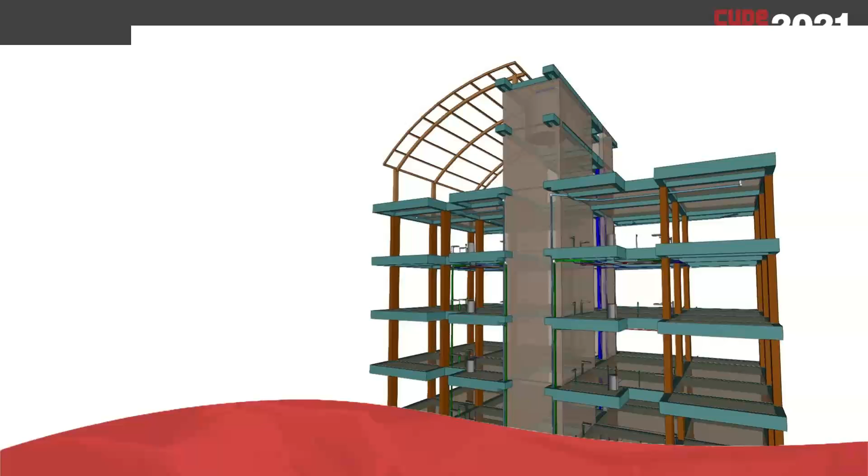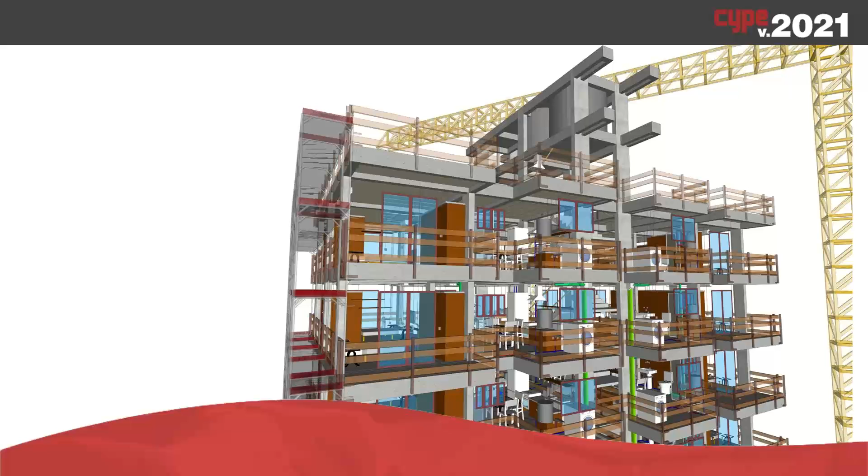Okay, here just showing some images. The idea is that we have all the disciplines that you need in a normal project. So all the building facilities, the structural calculations for steel and concrete structures, reinforced concrete structures. We also have the health and safety protections that we must have in our project during the construction of this building.

And this software is divided at this moment in two places. One of them is a setup that you can run on your computer, with a package of around 23 to 25 different applications. Here you have some of them. And then we have more than 120 other applications available on our cloud platform, BIMserver.center. Some of them are free, some have a paid version, and you can connect these applications between themselves, sending and receiving information.

I always try to explain BIMserver.center as a series. I'm from the 90s. In my country, there was a very famous series from Japan called the Power Rangers. The Power Rangers were different heroes, and each hero had a kind of vehicle that was actually a robot. These vehicles could work isolated, but it was much better when, at the end of each episode, these vehicles came together to turn into a big robot called the Megazord. This Megazord was much more powerful than the 5 different vehicles working alone.

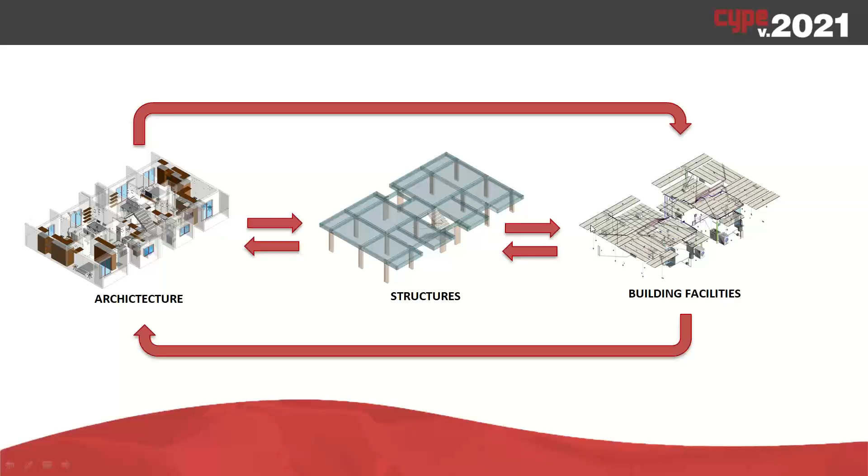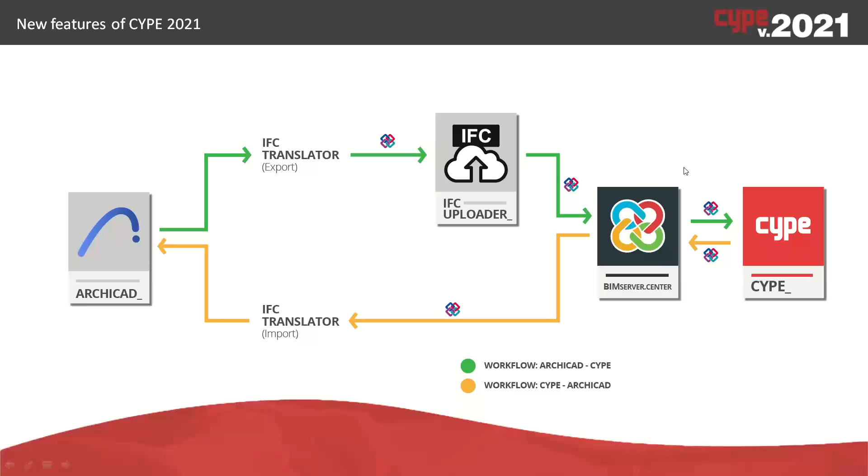objective of this platform. And we can also connect here other software that is not developed by CYPE, like Autodesk Revit or any other IFC that can come from ArchiCAD or Bentley or Trimble. If it's an IFC file, we can inject this information, this model, into the cloud using different workflows that we propose, and then interact with the CYPE tools. Okay, so that's the idea.

After that, I think we can see a little bit about the BIMserver.center platform. Today, these are real numbers; actually, they can update at any moment. We have around 72,000 users. It's a huge number of projects and downloaded applications, always working with IFC files. To access this platform, it's quite easy. Just search for it on Google or use your browser and type bimserver.center. So that's the name of the platform.

Here you find this platform in different languages. There are some presentation videos here. Here you can see the store where those applications I have been talking about are. You can find more information about our applications, the mobile version of BIMserver.center, applications to represent the projects in augmented reality or virtual reality. So here we have some information. And when we create our account, actually this account is free. You don't have to pay for that.

You see a kind of dashboard like this one where you can manage your projects. Here I have the last projects that my team has been working on. Some of them were created by me, but some were created by other teammates, and when was the last change. Here I can have an overview of some of my contacts. Inside this platform, we can add, find, or search for other contacts that are working using BIM technology to develop projects. So it's a great way to interact with other people that can be part of our team if we need some type of professional, for example.

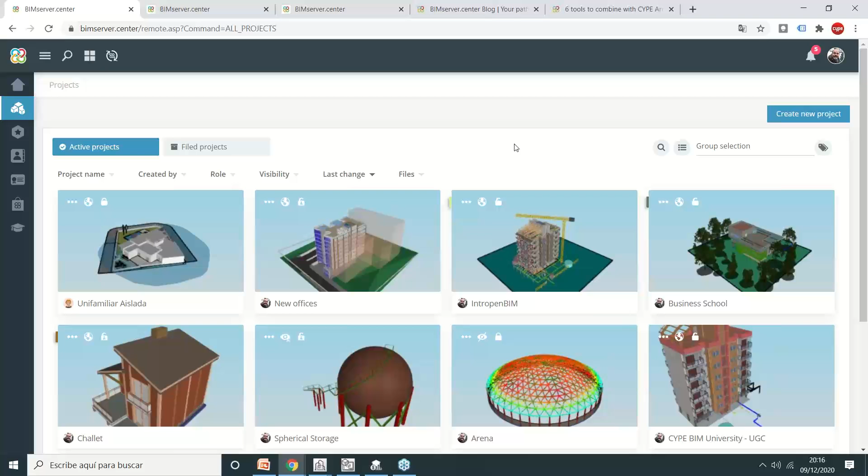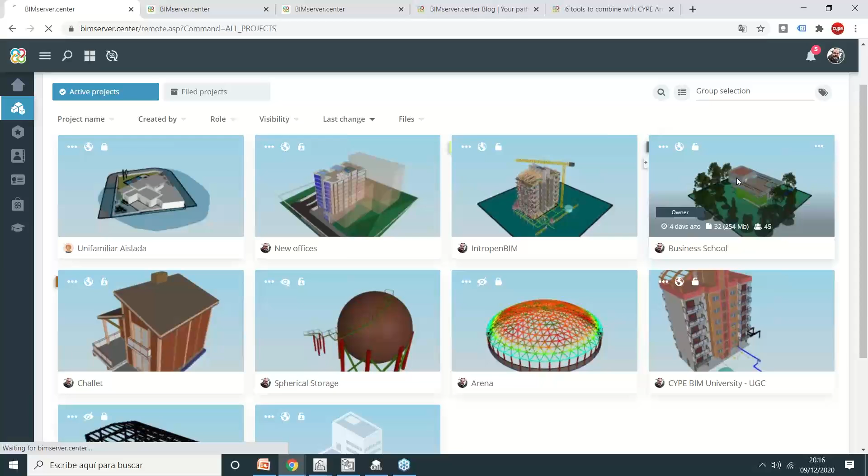So all the projects that I have been working on with CYPE and other software development tools, always using the IFC format. So we can send this information from one software to another, but actually we have a kind of copy of these projects in the cloud, and we can see this information without any application, just using our browser. This one, for example, the business school project. I'm the owner of this project. The last change was 4 days ago, and when we open it here, just repeating, without any application, just the internet browser. So it could be on your tablet, your computer, or your mobile phone.

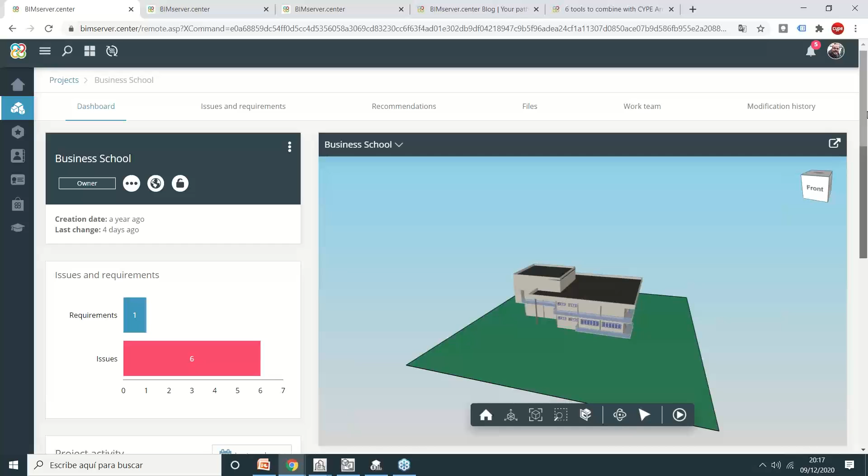Here we can have an overview of the project at this moment. Here we have a 3D view of this architectural model, this business school. And it's quite interesting because we have the other IFCs that came from different applications. For example, here we can activate the structural model, and, let's wait a little bit here, the water supply installation project. So we can see not just the architectural model, but all the other disciplines, depending on the disciplines we have been working on before, here on the cloud.

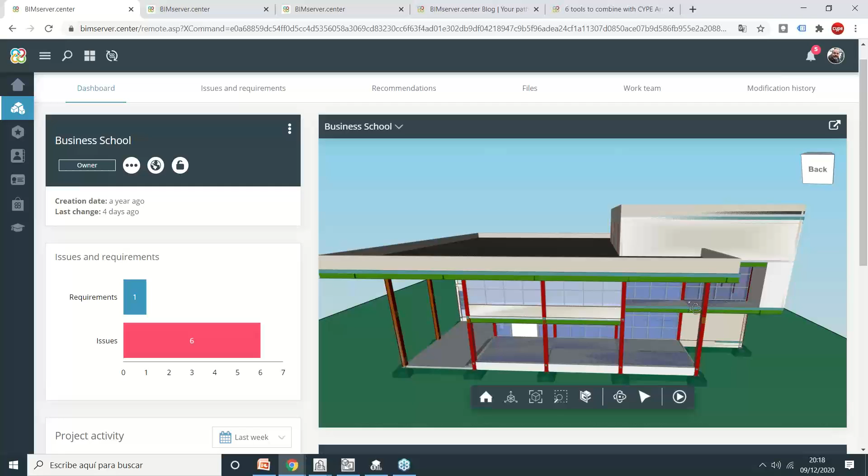Of course, there's the size of the project. It's important because some projects can be very big, and then it's going to be difficult to represent that in a browser environment. But here you can see the structure; it was a steel structure that was uploaded to the project. It's just an easy way to have an overview of the project, because this information is actually created in some software, and we can see it more precisely using the applications themselves. Here we have some issues and requirements that the platform is telling us we must solve.

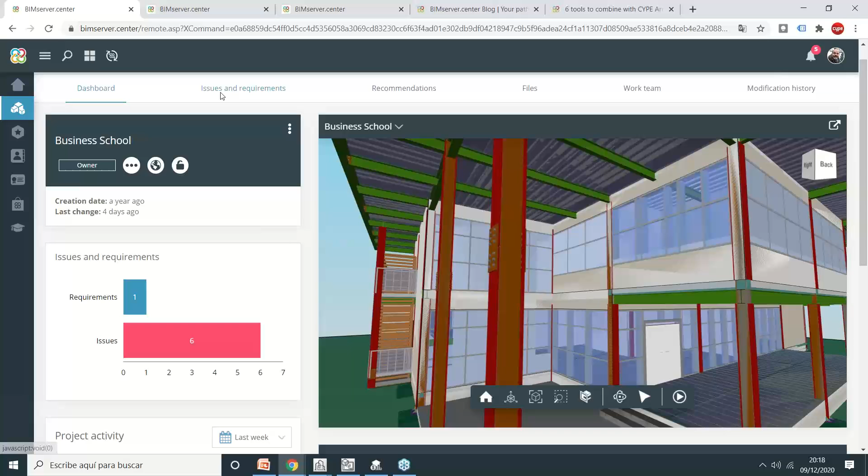We have here a kind of system where you can send information, ask for changes, or point out some problems that we have in our projects, sending issues or requirements. So we can consult this information here. At this moment, we have some pending issues that we could solve.

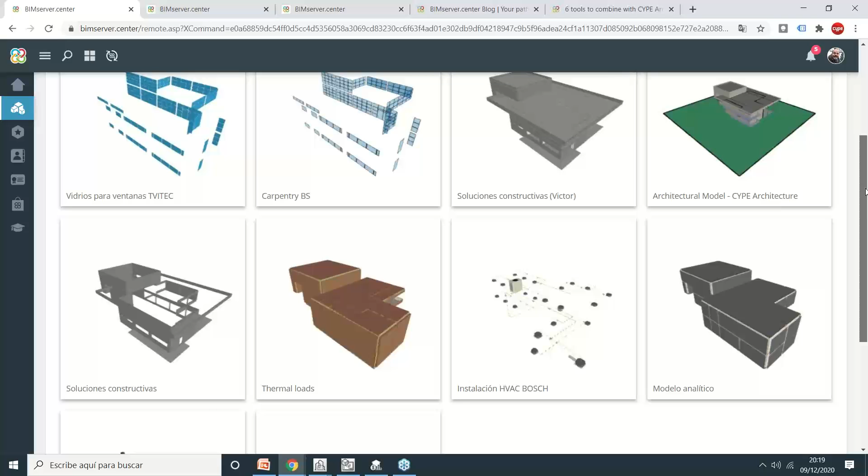Let's see how many files we have at this moment. So here we have 4, 8, 10 files, 10 different files, I think. One of them was just the project of the windows of this building, so it was an IFC that was created separately from the architectural model. Here the architectural model itself. Here the thermal loads that were calculated with a specific software for that.

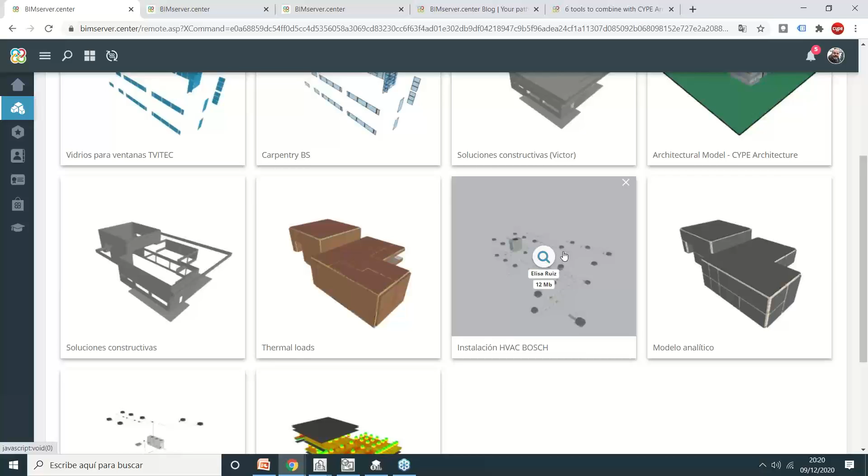Here the HVAC installation calculated with a system developed by Bosch. So different disciplines were developed for this project, and we can see the files here on the cloud. We can also see our work team, and in this part of the project, we can invite any other user of the platform to work together with us.

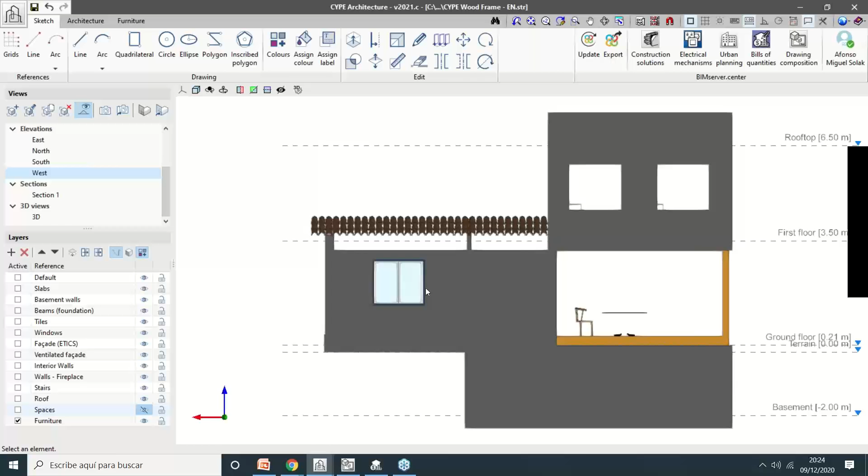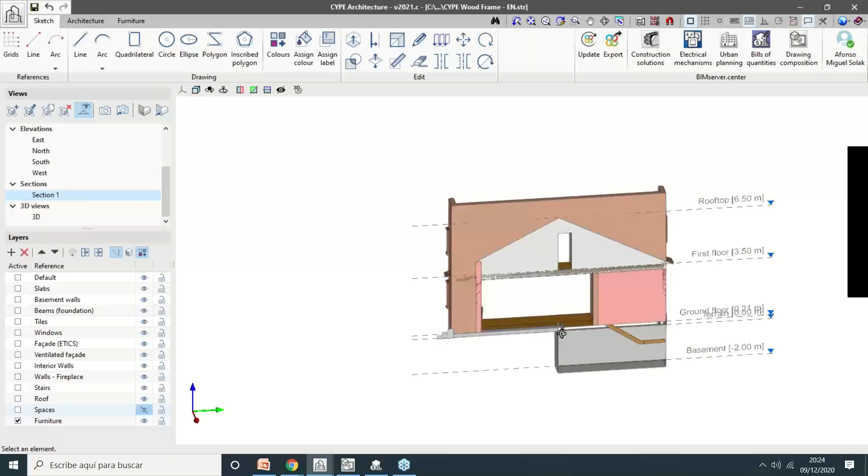And with these views, it's going to be easier to develop the model, because sometimes the model is complex. It's not easy to see what we have inside of the model. So by creating some elevations or some sections, it's going to be easier. We can also create different layers. So for example, coming back here to the 3D view, I created these layers that you can see here.

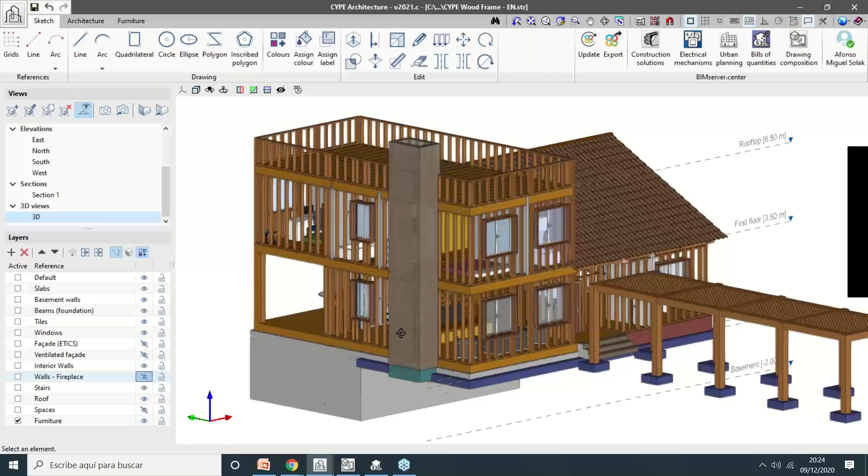So for example, let's deactivate the facades here, or another layer that was this other facade, a second type here. For example, the fireplace walls here. Okay, so I created different layers just to make it easier to develop this model.

And we can also, for example, unselect everything here, and you can see some other IFCs that were synchronized with the software using the BIMserver.center platform. What does it mean? It means that we have been using these buttons here. So we exported the IFC from CYPE Architecture to BIMserver.center before.

Someone received this information, worked with this information, developed a structural calculation, a wood frame like this one, for example, using, I don't know, CYPECAD or StruBIM, CYPE 3D. There are different softwares for structural analysis. They sent this information back, I updated using this button here, and now I have information from a colleague inside of my software.

Okay, so we always have this workflow. We will send and receive information to the platform using these buttons here, the export and update buttons that are present in all the softwares that are connected to this platform.

Actually, if we click on one of these views here with the right button of our mouse, we can see other IFCs that were sent by colleagues. At this moment, CYPECAD wood frame, it was the name of a project that a colleague sent to the platform, and now it's visible here on this view that we call 3D.

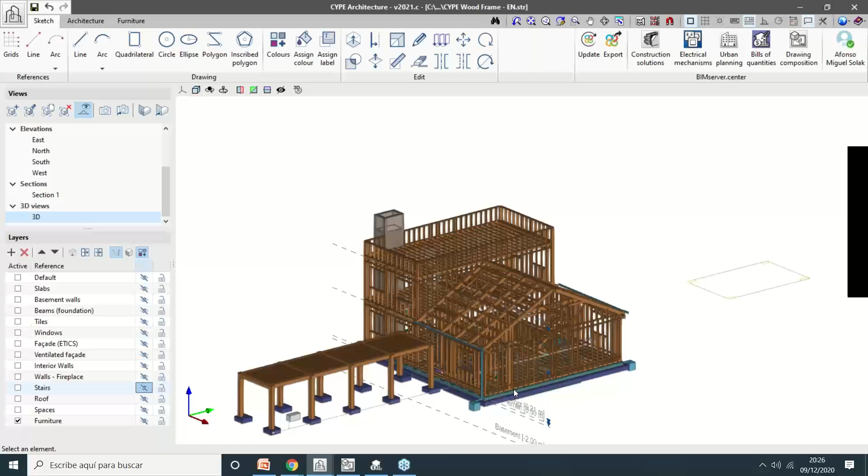Okay, so if we activate here, for example, these other sanitary systems and water systems, so plumbing facilities, we can also see that now these plumbing facilities are visible here on the software. They were not developed here on CYPE Architecture. They were developed on CYPE Plumbing, on CYPECAD, but we can work with them integrated in the same model, in the same Open BIM project.

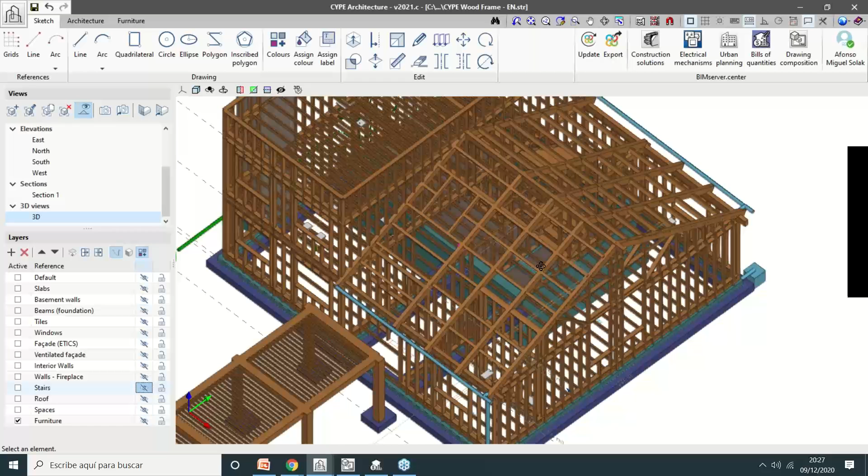All right, so we have been talking about the sketch tab, but we also have here the architecture tab. So we can first plan our building, creating here some geometry, but in the end, the result will be the IFC model or the architectural model created with construction elements. So here we are talking about vertical elements like different types of walls, curtain walls, roofs, railings, also columns.

Here we have also the different types of slabs: internal floor slabs, roofs, screeds, external floors. So different slabs. We can also add some suspended ceilings, some beams here. Horizontal elements. Then we can add some slope formation when we have a flat roof, for example, or add the roof tiles as we have here.

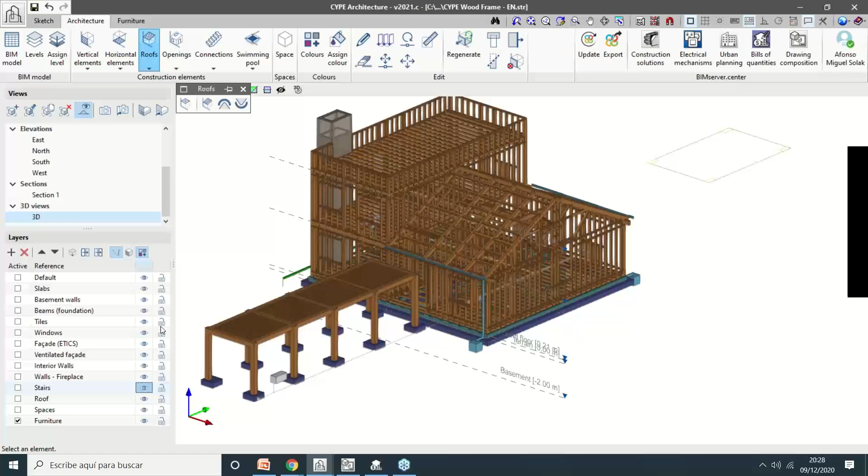Let's select these layers again. So these roofs, let me deactivate this space. So these tiles were created using the roof tiles option. We can add these details that we can have here on the roof.

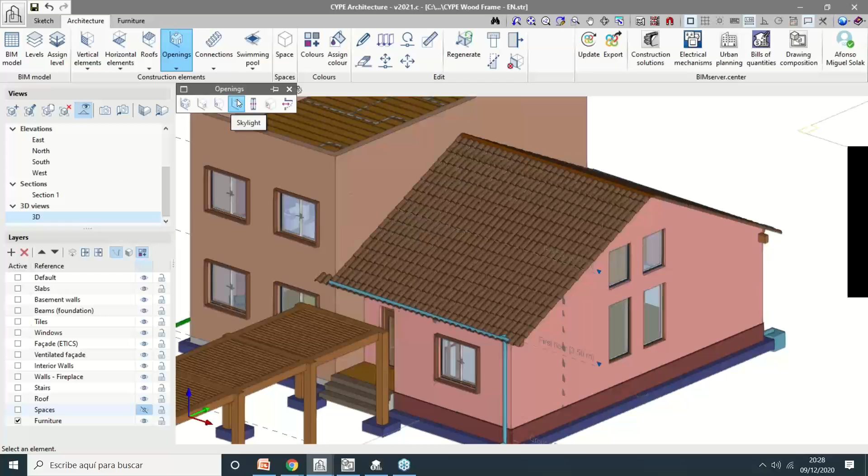The openings, so different types of openings: the doors, the windows, the skylights that we can have in our project. We can adjust the position of these apertures or openings. After we introduce one of these openings, we can change the position and also update this information. So different tools to introduce openings.

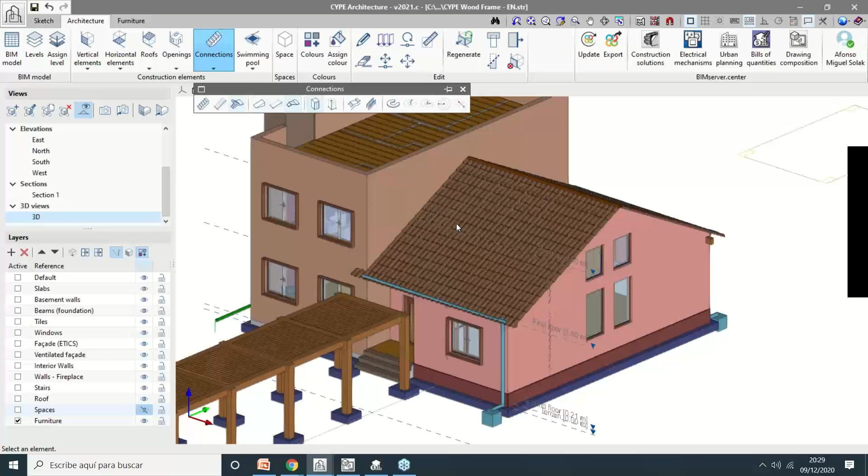We also have some vertical connections like stairs, ramps, elevators, lifts. So circular ramps, curved ramps, different options to add a vertical connection, and also some swimming pools. In this project we don't have a swimming pool, but let's introduce one here. To introduce a swimming pool, it's quite easy. We just have to add a reference.

We can also classify these elements using labels. Sometimes, for example, if we create a wall, it's easier to group these walls with a specific name, a specific size or a specific type. So we can do that using these labels here. With swimming pools it's not that common, because we usually have just one or maybe two swimming pools in the same project. But for columns or types of slabs, it's very useful to add labels here.

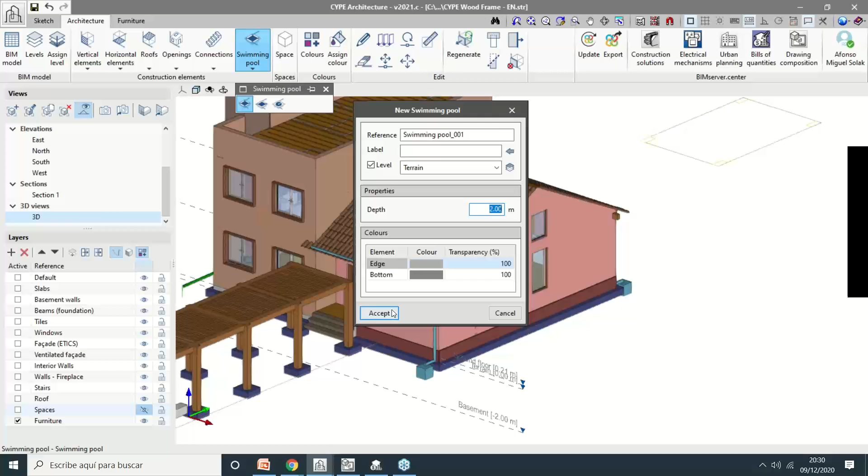We can add this swimming pool in a specific level. For example, in this project we created before these 5 levels: the basement, terrain, ground floor, first floor, and rooftop. In this case I'll create it on the terrain. Then we can set the depth of this swimming pool, some colors, and then we just have to select the terrain and start drawing the perimeter of this swimming pool. Let's wait here.

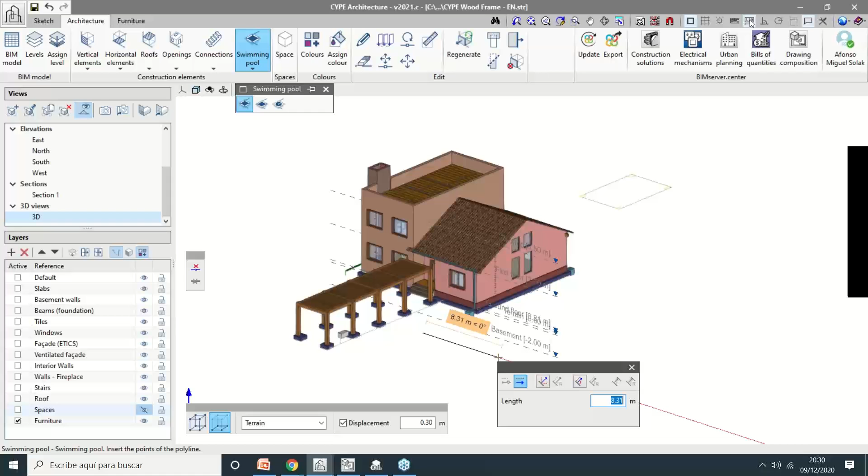Okay, so we can start creating our swimming pool. We have here some tools to add the length of each segment of this perimeter. We can activate and deactivate this option using this little button here. Okay, so here, let's deactivate here. Then, for example, here, and yeah, here we have a little swimming pool.

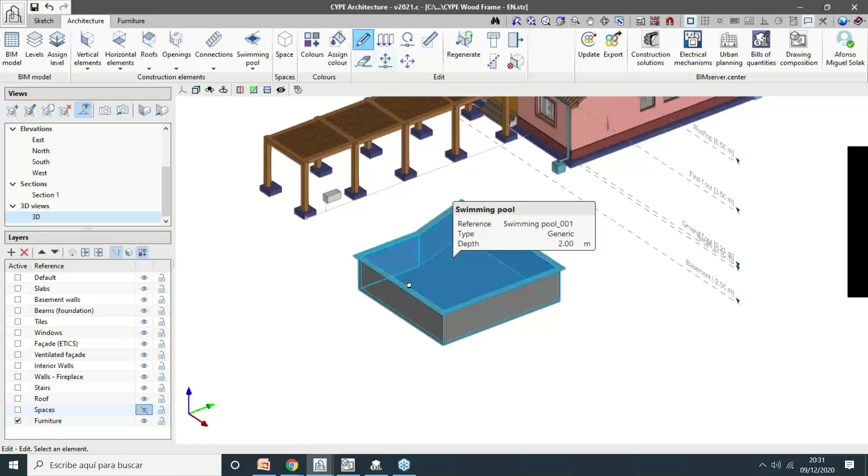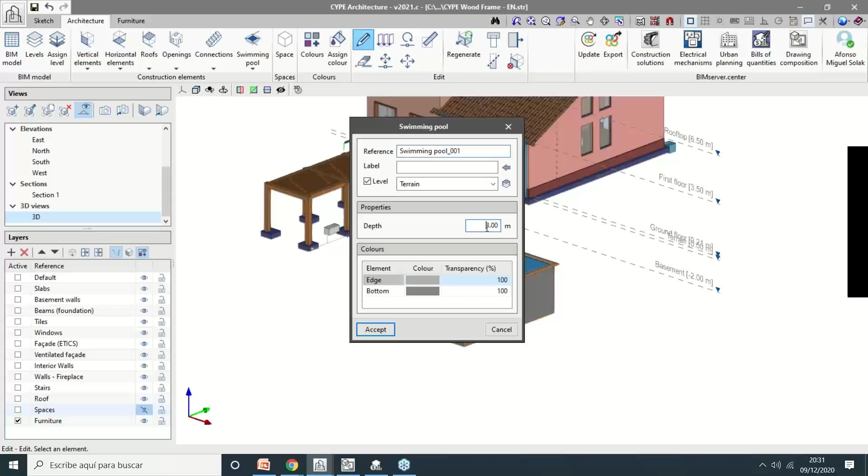Okay, so very easy to introduce a swimming pool on the project. I'm using the swimming pool as an example, but the other elements are quite similar. So we must select the construction elements from the menus here and introduce that on the model. We can also use this edit button here and change some parameters at any moment. So let's put here 2 meters again, and the element is changed.

You can see that each element has different parameters. So this is a wall, the wall properties. This is the name, the reference that we choose for this wall. We created different types of walls here. Then we have here different codes for the different types of walls that we have on the project. Each element is associated to a level, having a different adjustment.

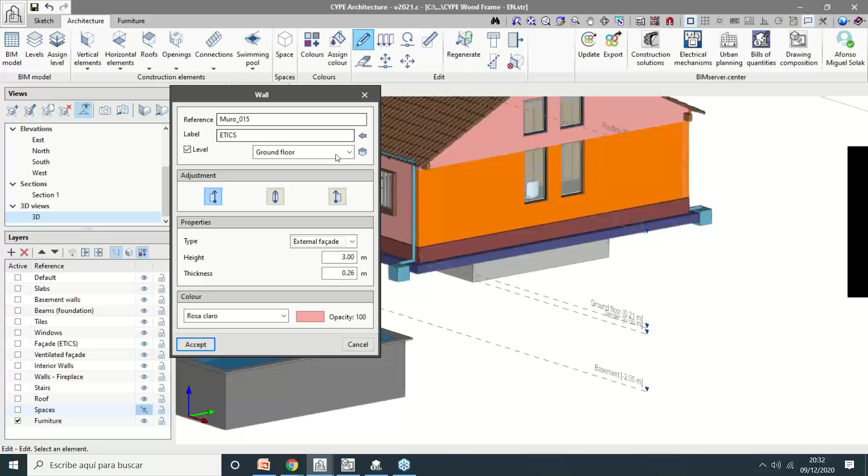It means that we can introduce this element adopting a line that is on the external face of this wall, or a central line in the middle of this wall, or the internal face, for example. The type, if it's an internal partition, a basement wall, external facade. So these are different parameters of a wall. We can change this information at any moment.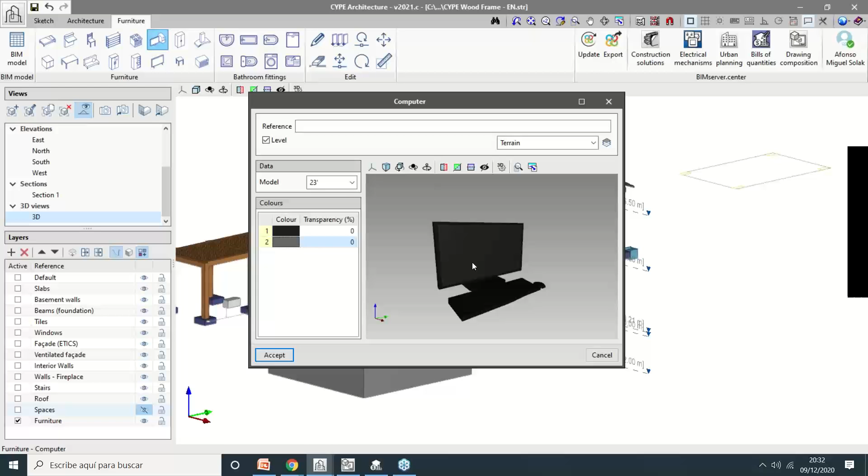Once we finish the model, we can also add some furniture. So here we have different furniture, like this computer here. We can add this computer. We can choose some parameters about this computer, change to black here, different parameters for this computer. Remember that we are always talking about IFC entities.

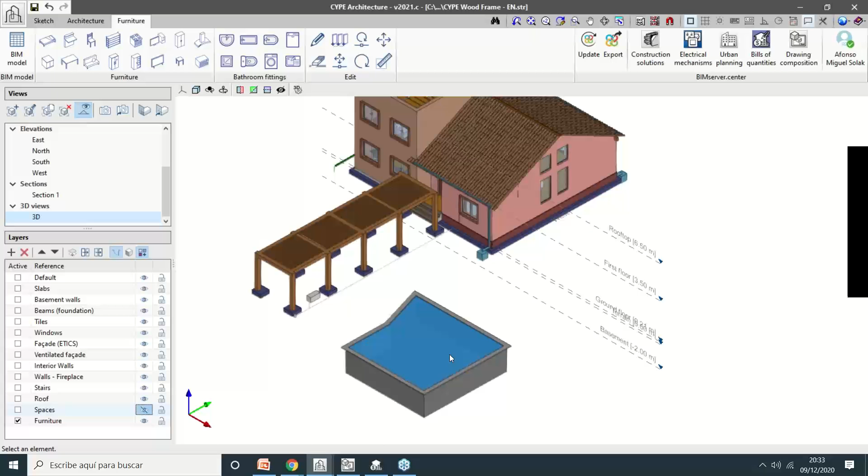So when we press this button here, export, all the information that is generated using the software will create an IFC file that will be exported and used in the platform as the format that will interact with the other applications. There is something that is quite interesting, because here when we create a sketch, for example, let's do something here.

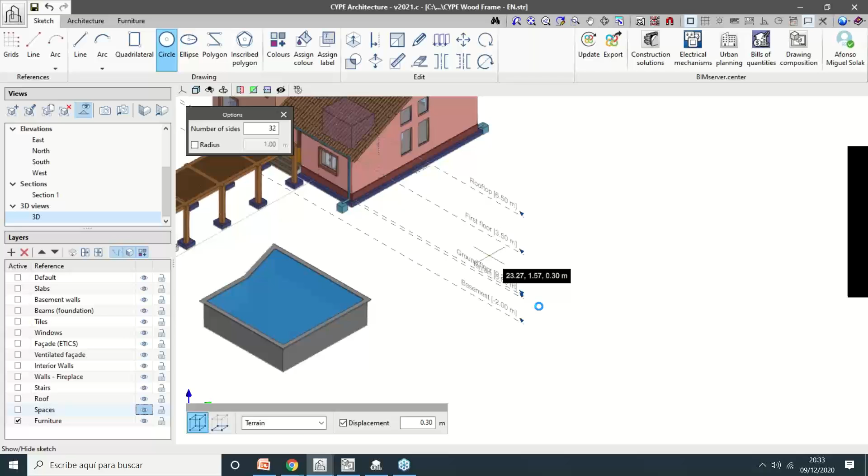Let's add, for example, a cylinder here. First, we'll create a circle. This circle here. Oh, it's not. Let me activate the sketch information. Just a second, because here we have a little button to show or hide the sketch information. I don't know if we have time to do an example. Okay, so now we have here. So I create this circle here.

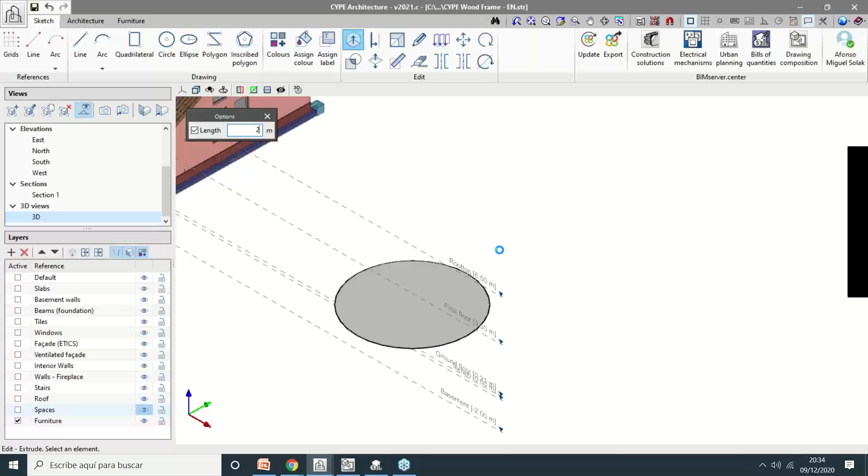Then I will extrude this cylinder, choosing, for example, a length of 2 meters or 3 meters. Let's wait here. I think it's a little bit slow because we have a lot of applications working together. So here, 2 meters, for example. And then we can select one surface and transform this 2D drawing into a 3D geometry. So for example, like this.

We can also do it again, or delete, or create an offset of this model here. So like this, something like that. So just 3D modeling tools. But there is a point that is very interesting: these elements from the construction elements tab can be created from the elements that we drew before using the sketch tools.

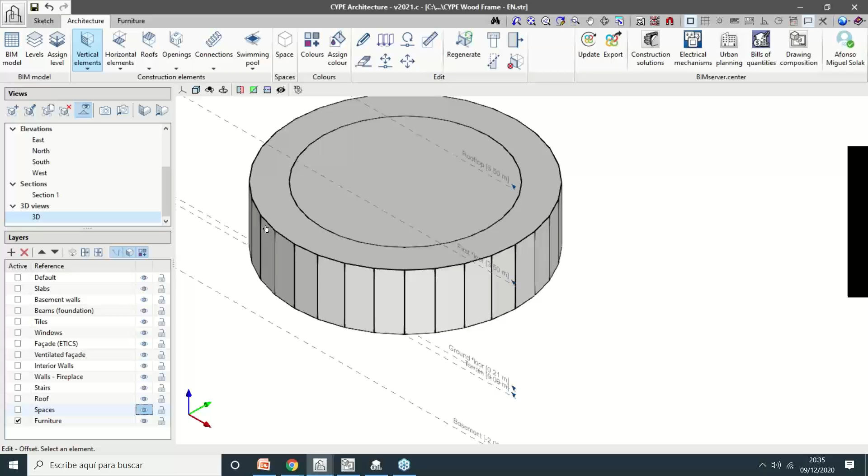So here on the architecture, let's suppose that this part is a roof. We can come here and select a slab, for example, and say that this slab is a roof. This roof has a thickness of 30 centimeters, for example, and then we can choose this kind of entry mode that is per surface area.

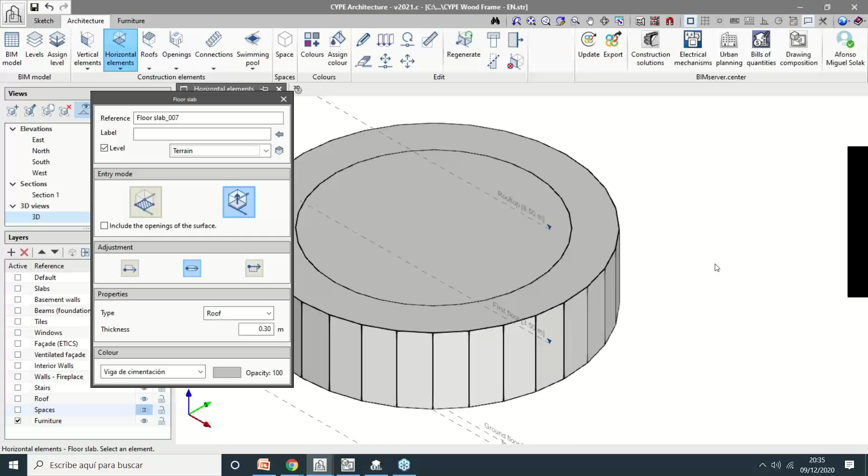So when we choose this type of introduction to create the elements, we can select the surfaces created before on the sketch tab and convert these surfaces into construction elements that will be exported according to the IFC format, according to the buildingSMART standard. So that's quite interesting because we can create different forms. So it's very flexible. We can create some geometries that sometimes are not too easy to generate.

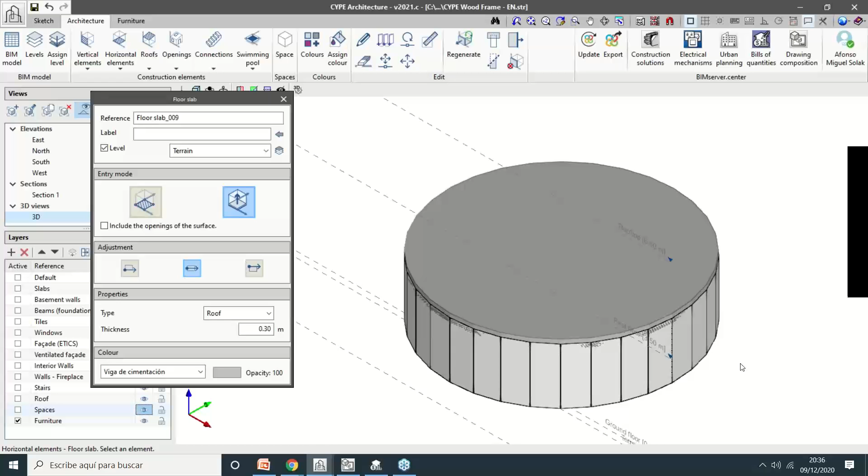But if we work with this sketch model before and then turn this sketch into a BIM model, it's going to be easier and we can reach different geometries. All right. So here, as I said before, once it's finished, we can export this information to the platform.

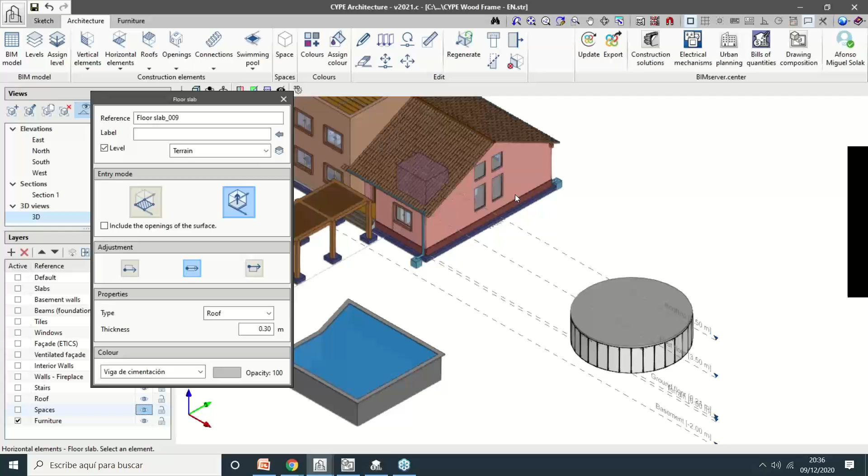And when we install the applications that are compatible with the platform, we will install a synchronizer. That is this little icon that we have here near the clock. That is the BIM Server Center synchronizer. Okay, so here we can add some different accounts. And in this case, I have just my account that is connected in this computer.

So 13 of my projects are synchronized with this computer that I'm working on now. But maybe we can have more projects that are just in the cloud at this moment because they were finished and we are just storing these projects on the cloud. Okay, so we can see these 13 projects that are synchronized with this computer, but we can change that and select the projects that we want to synchronize with this computer.

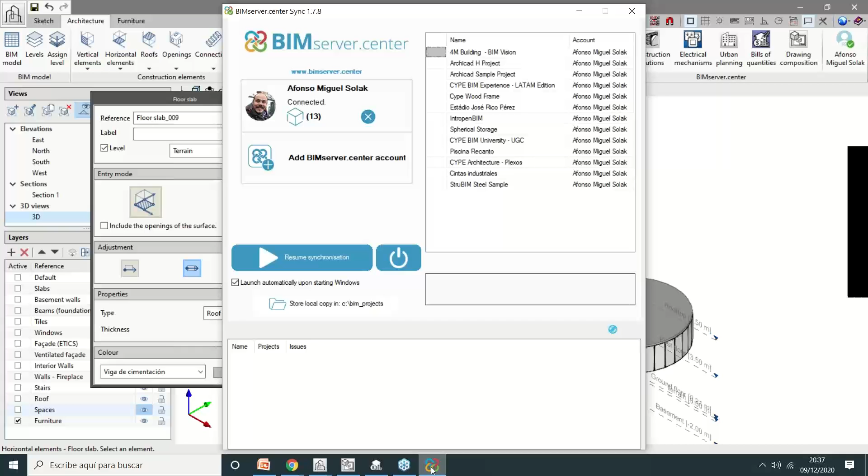Okay, so when one project is synchronized with this computer, we can send and receive information using these buttons, because when we click here, we will choose a name for this IFC that we are generating from CYPE Architecture, for example, but it would be the same for other projects. And the software will start generating this IFC and start uploading this IFC to the platform.

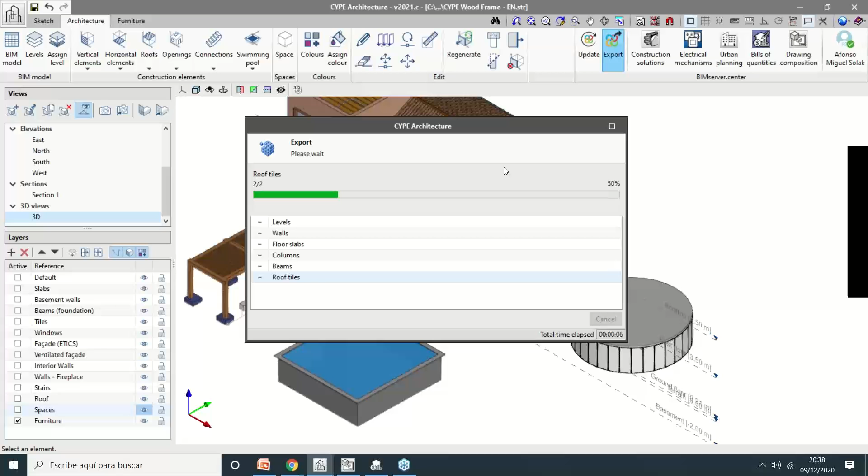Then we can come to a second application. For example, this application here is used to generate the bill of quantities of the building. So based on the IFC model, we can, for example, let me click here. There's this button here where we can select the project that we are working on. So I previously selected the same project where that model that was created with CYPE Architecture is located.

Okay, so it's the same folder on the cloud, and inside of that folder on the cloud we have different IFCs. So some IFCs that came from CYPECAD for the structural model, or here, for example, the HVAC system or the wireless project, or here, for example, we have also some information that came from Autodesk Revit, or information from different disciplines, different softwares that work with the platform. We can select which IFCs we would like to import to this second application. So in this case, which IFCs will be considered in the bill of quantities in the future.

Okay, to be faster, I just selected CYPE Architecture and CYPECAD, the same that we saw before, and then we can work, in this case, for example, generating the bill of quantities based on the IFC entities that we have on this model. So here we will create a cost database or we can import a cost database, then set some measurement rules to create a correlation between the information that is on the BIM model and the information that is on the cost database to then generate a bill of quantities. And in the end, we will extract all the measurements of this project based on the BIM model, and have a bill of quantities.

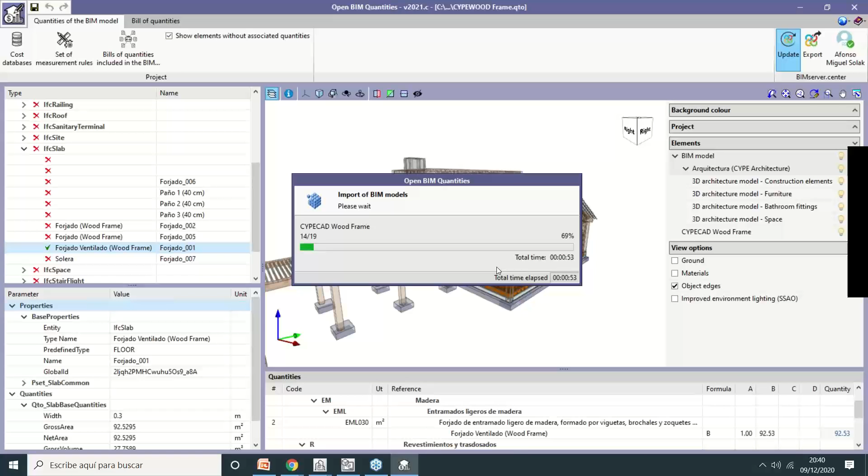Okay, so at this moment, the project has 12 or 13 IFCs. So I selected just 2 of them. They were imported here to Open BIM Quantities, that is the name of this application, just using the button update. Okay, so as you can see here, there's my name here because I'm also logged in this application using the same account that I have on BIM Server Center.

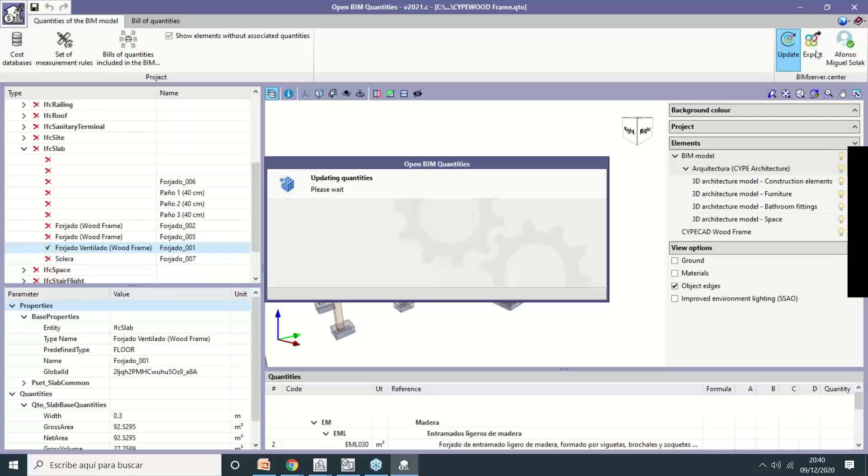Okay, that's very interesting because when we change something, for example, let's suppose that we change something here on CYPE Architecture. Let's open it here. I think it's here. So our CYPE Architecture isn't exporting yet. Let me open another example here. When we change something here and we export this file again, the other users that are working in the same project are notified that there are changes on the project. So not just from CYPE Architecture to other users, but from any user to other users.

So at this moment, for example, we can see that in this project, that is totally different, here we have another model with different layers, with different geometry, and also different IFCs that are synchronized to this platform. This button is flashing, and there are a lot of files. You can see that some files were created and some files were modified since I updated the last time. So the platform tells us there are some differences on the project, and we can click here and choose which file we want to update and keep working on the project. So that's how it works.

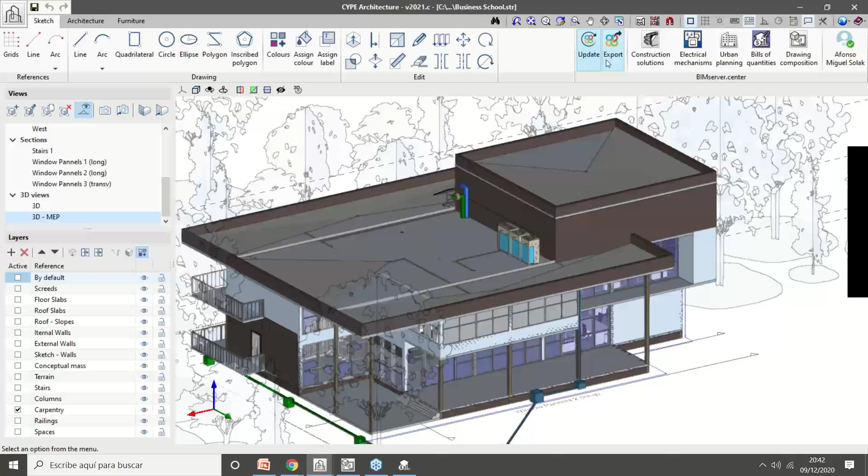Okay, so here in Quantities it is importing this information, updating this information. There are some quantities that probably changed since we synchronized the last time. Let me show you some other examples here. For example, Open BIM Layout. Open BIM Layout is another tool that is also connected to the same system.

It's a free tool too. Okay, so with this tool we can generate the different drawings that we have in our project. So here we can create DWG or PDF drawings from this BIM model. So here we created 8 different sheets, like the ground floor, the first floor, the rooftop.

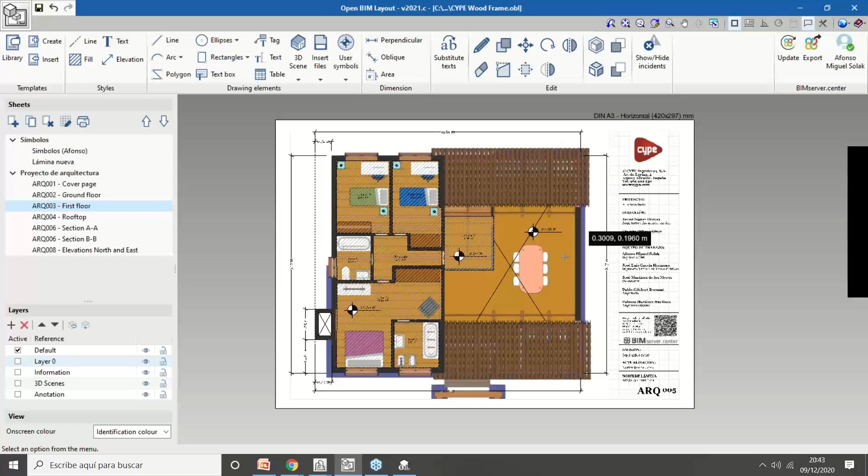Here we can add annotation, we can add the dimensions of these models. Okay, so we can create, for example, some section planes. We can add text, tables, always connecting this program with the platform and using this button to receive the information from other softwares. It's very interesting because here, let me show you.

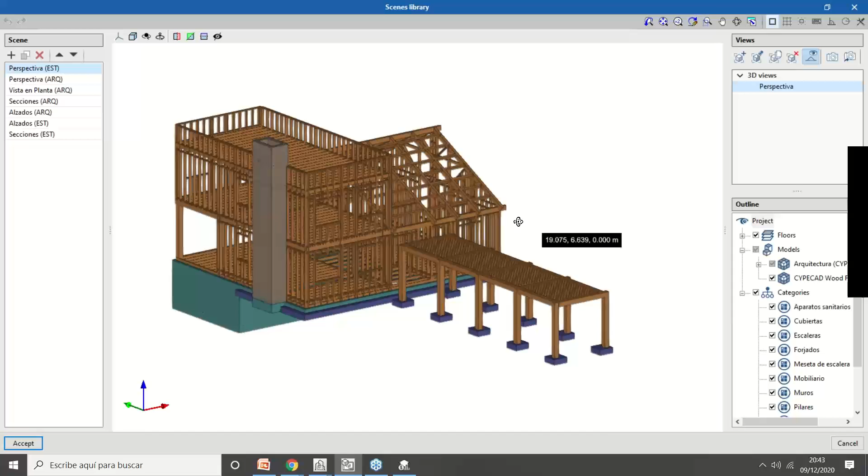We have this button here that is the 3D scene, where we can create a library of 3D scenes. These scenes can come from the BIM models. So here we can activate different IFCs. So I have an IFC that was created with CYPE Architecture, and another one that was created with CYPECAD.

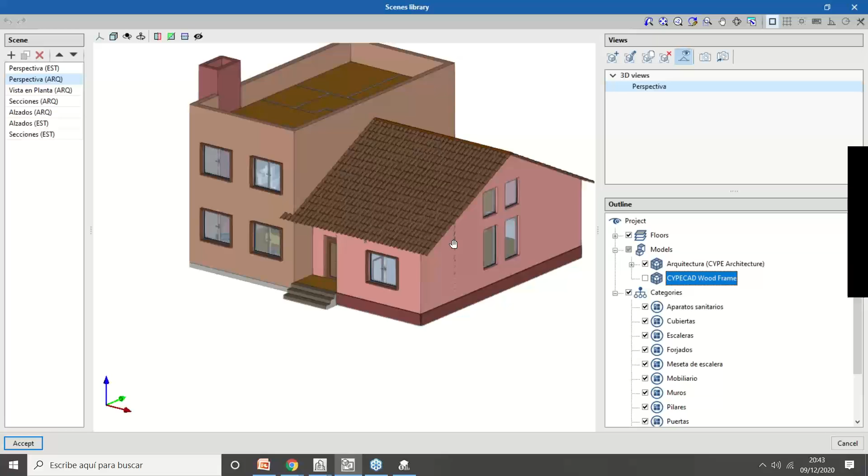So for example, in this one, we have both of them activated, but if we deactivate CYPECAD, we have just information that comes from the architectural model. Or we can reverse this selection and have just the structural model, or we can have both of them. Or maybe the architectural model, we can put it on transparent.

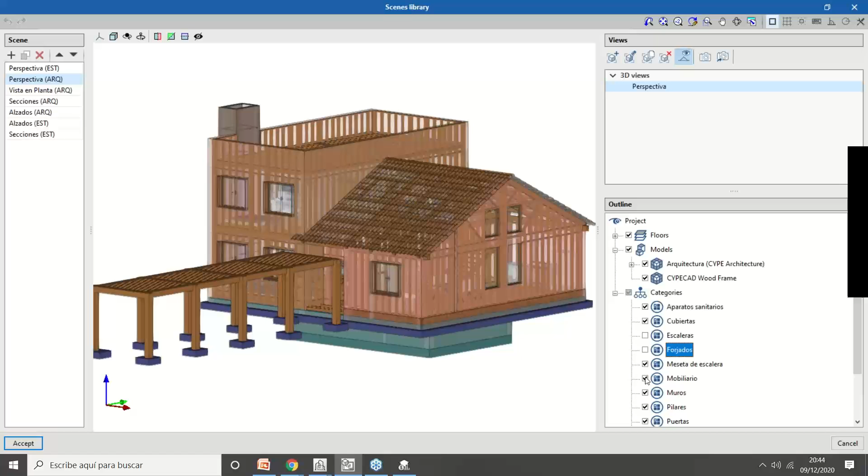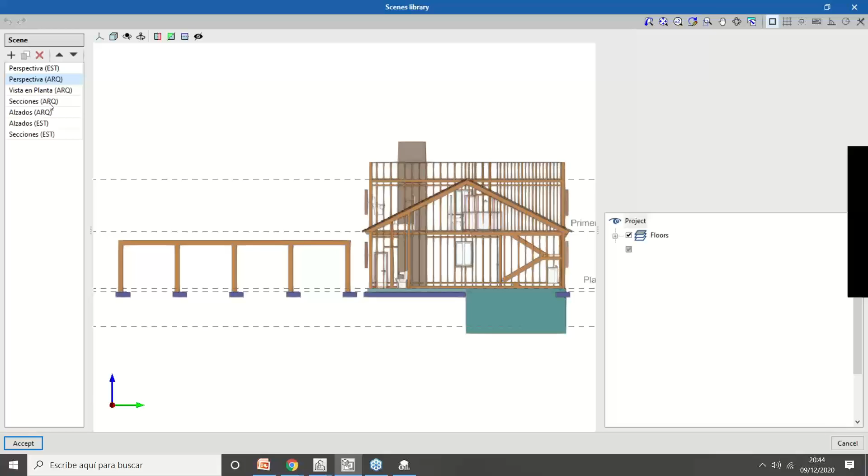And then we can activate the different categories, like just the stairs, or just the slabs, or just the furniture, or just the walls. So here we can have different filters to create a scene. So this one, for example, I call the perspective to the architectural model, just a name that I created. This scene could be a 3D view, but could be a section, or could be an elevation. So we can create the different scenes here.

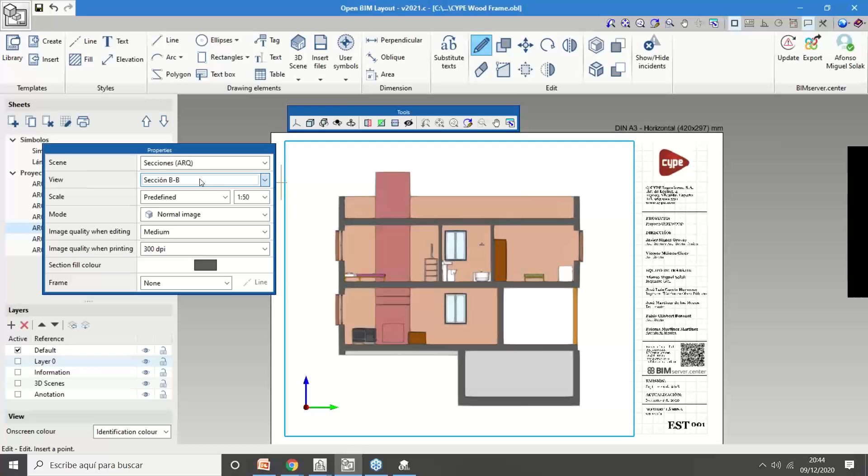And also we have this library of scenes. We can add these scenes into the sheets. So for example, here it was the section AA, but I created before the section BB. I just have to select section BB, click out of this scene, and then we have this section BB here.

So then we can create these graphical documents that we must present to the city hall or to our client, whatever. So here, we can export that on PDF or DWG to send it to someone. Okay, so it's just another example about how it works.

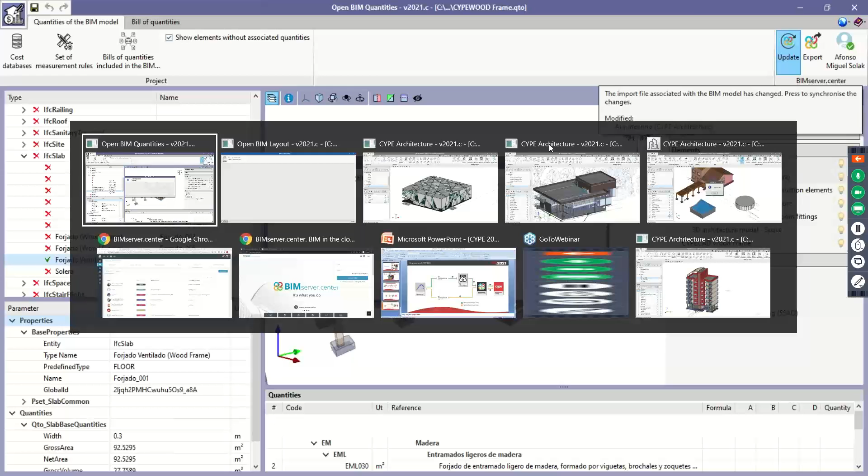We have again these buttons, the export and update button, and if we click on update, we will see the different IFCs. So the same IFCs that we saw before on Open BIM Quantities, we have on Open BIM Layout in this case. Okay, so too many things together here. Let's see, where is that? Here on Open BIM Layout, the same IFCs.

And if we want to create, for example, the documents that come from the HVAC model, we can just select this file and represent the ducts or the machines that come from the HVAC system. Okay. All right.

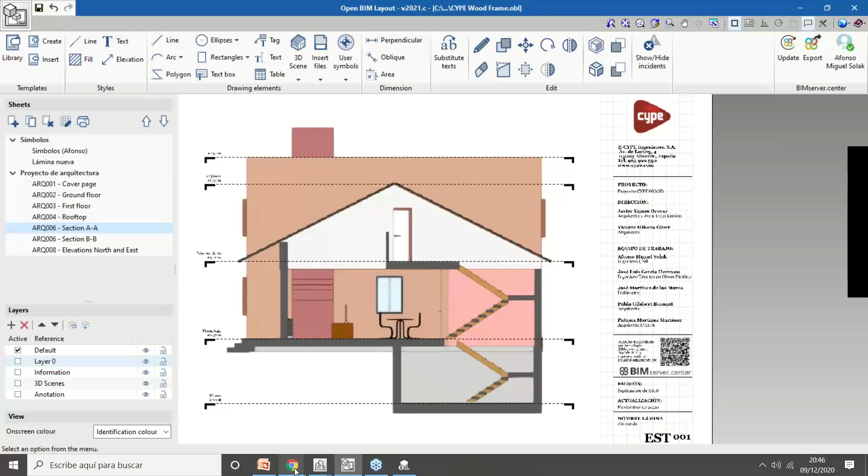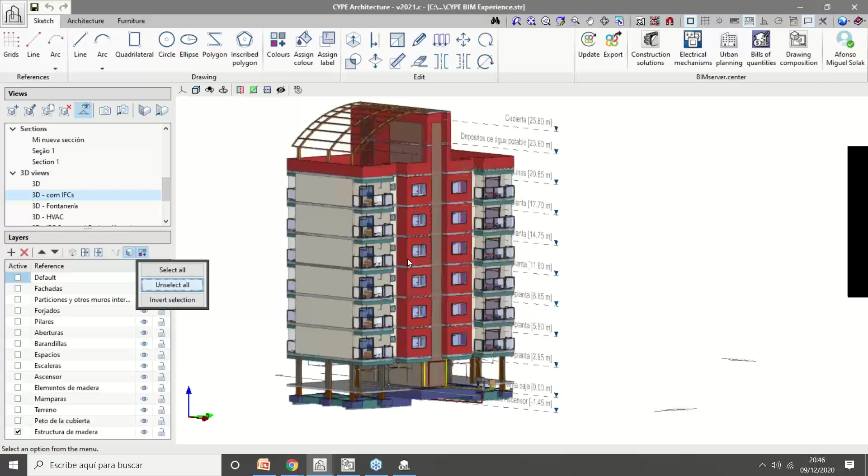Let me show you some other options that we have on the platform. Oh, before, we can see some examples that are very nice. So this one, I think it's quite nice because it's a little building, six or seven story building, and it's very interesting because if we deactivate the layers created in the architectural model, we can see all the IFCs that were created with other applications that are on the platform and synchronized.

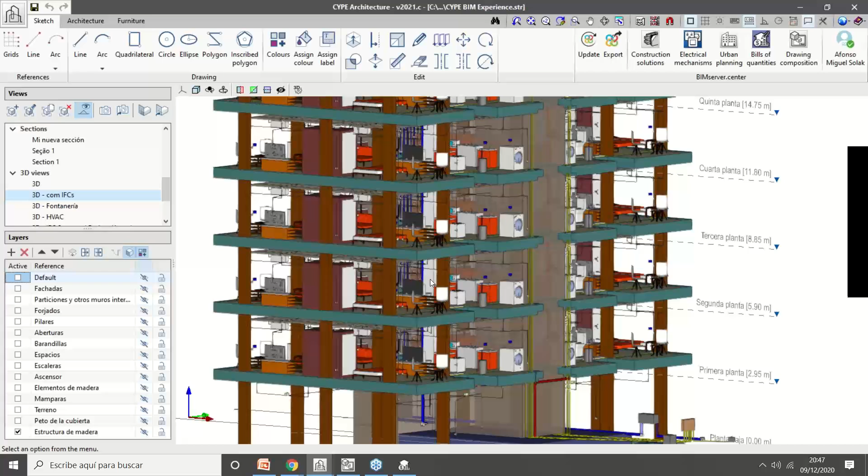And let's suppose I was the architect of this project and I received this information. So they were integrated on the platform, on the model. So here we can see the furniture, all the electrical facilities, the plumbing facilities, the structural model. Okay. So here we can create different combinations of files.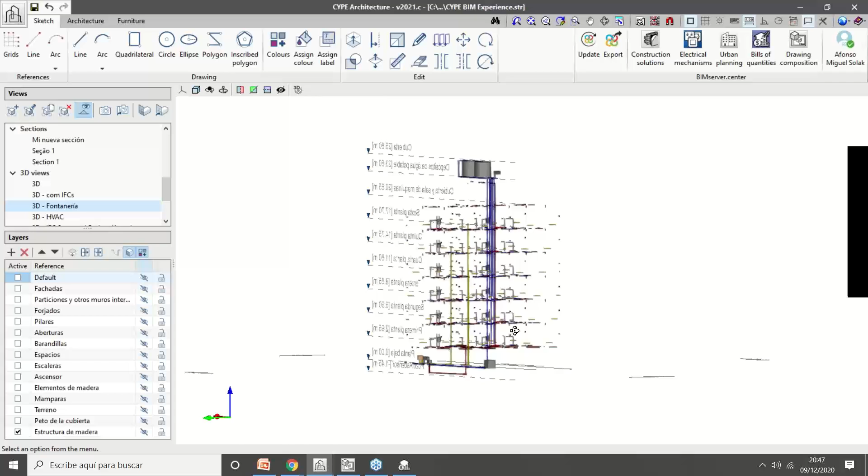Let's suppose that these are just IFCs that come from the plumbing facilities, for example, the fire protection facilities, and then the gas facilities. Here we have the gas facilities, and then, for example, the water facilities, some of them here. So when we accept that, we can see these IFCs, and we can create this filter. We can create a lot of them. Okay, but our model is here, our architectural model.

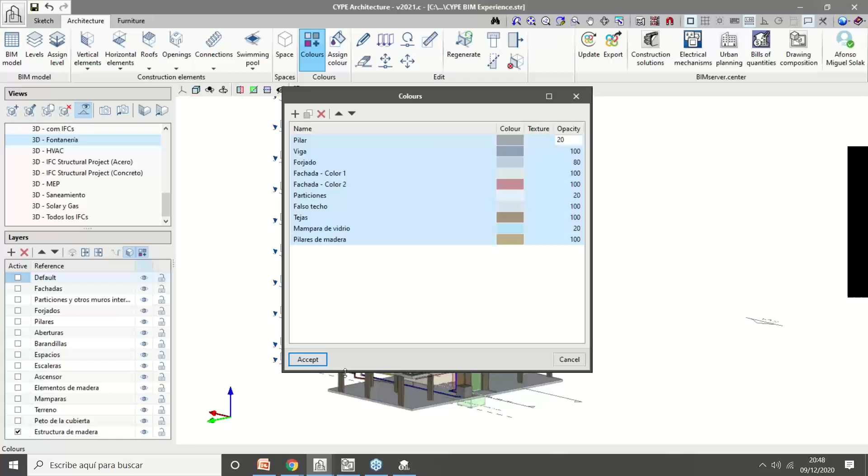We can change, for example, the colors. We can change these colors, changing the opacity, and let's suppose everything is transparent, just to create a kind of nice view. So here we can see a little bit inside of our building. For example, if we deactivate the spaces, it's going to be easier to see. Okay, but we can also create a section here, for example, and see inside of this model. Okay.

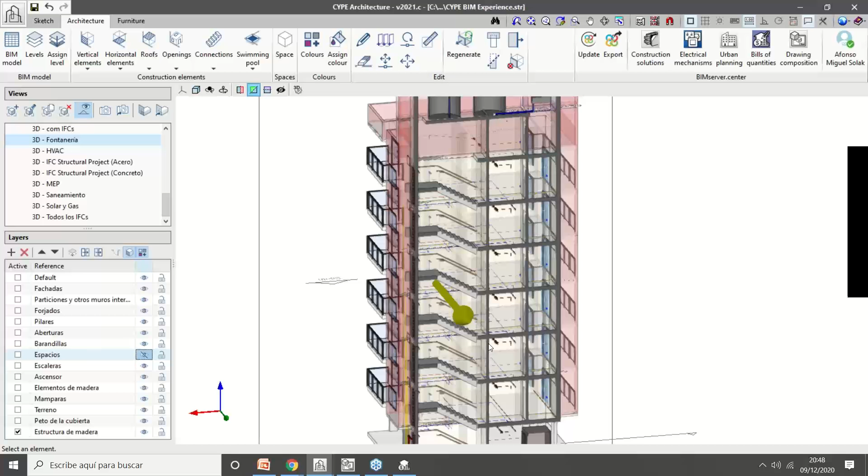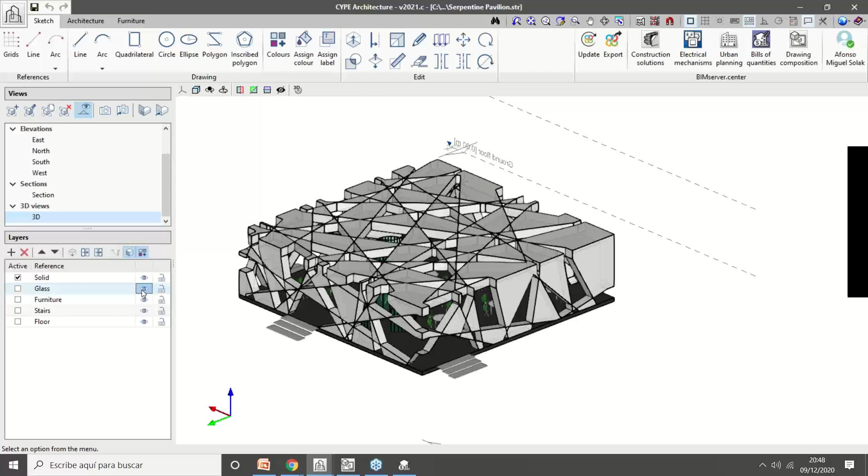Just here another example. This example is quite simple. It's a famous building that was constructed in London years ago. So here we have just 5 layers: a solid material, then a glass material, then the furniture, then the stairs, and then the floor. So it's a model that is in an earlier phase of the project. So here we have just this IFC, and actually it's just a sketch of the model.

So we can export this information. We can see this information, for example, using the augmented reality technology that we have on the BIMserver.center platform, but we don't have the BIM model yet. We have just a sketch of this model, but at any moment we can change these surfaces into BIM entities or IFC entities and export that to the platform and work with other applications. Okay, just some examples.

Coming back here to the platform, let me show you some things that are very interesting. For example, here we have a recommended projects tab, according to my profile, the place I am in at this moment, and the preferences that we have. Here we can see different projects that could be recommended to me. So maybe it could be interesting to me to work with these teams or people that are looking for different engineers or architects.

Here I can manage my contacts. So we can create groups of contacts. I created here, for example, a group that is my teammates from CYPE, or the Brazilian teammates, or other groups that we can create here. So here we can manage these people and add new contacts. If we know that someone has an account on the platform, we can just add the email of this contact using this button here. And once this person is in our contact list, we can add them to a project and work together in the same project.

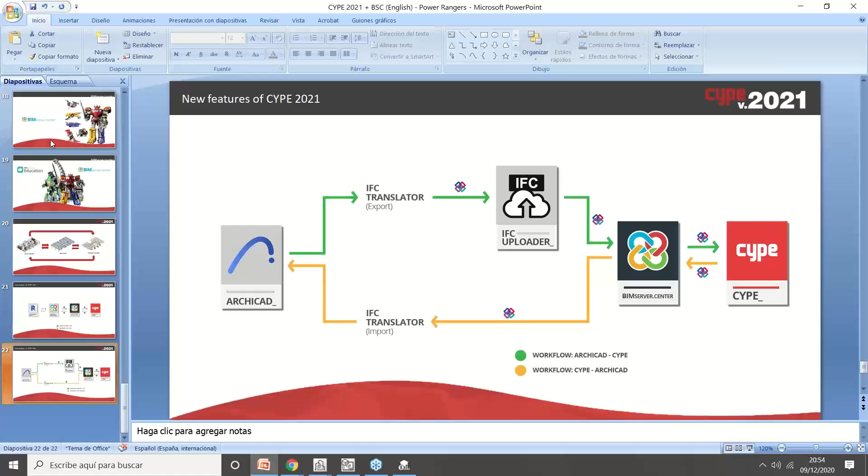As I said before, we just have these 50 minutes to show a lot of things that we have here on the platform. These 3 examples, I think they are enough to show a little bit about this huge iceberg that is the BIMserver.center platform. We just saw the top of this iceberg. You can imagine that our Megazord, as I said before, can be much bigger than just 5 pieces.

So in this example, we used 3 of these pieces, but imagine that with 137 different pieces, you can mount this Megazord at any time with the needs of your project. You don't have to use all the tools that we have on the platform. It depends on the type of your project, the size of your project, the needs that you have on your project. So you can create the toolbox, let's say, depending on the needs that you have. Okay.

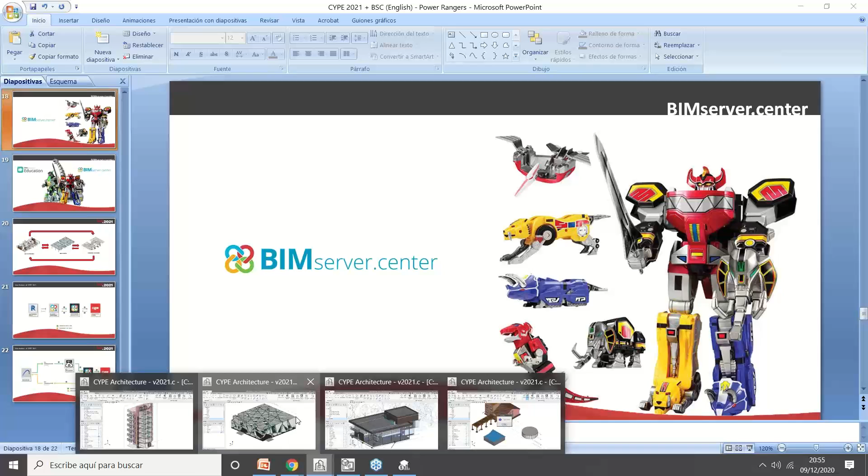Yes, thank you, Alfonso. We have one question. Is clash detection possible? Yes. We have here on the platform one tool that is called Open BIM Model Checker. Okay, Open BIM Model Checker here. So yeah, this one here. So the Open BIM Model Checker is a specific tool that works with the same system.

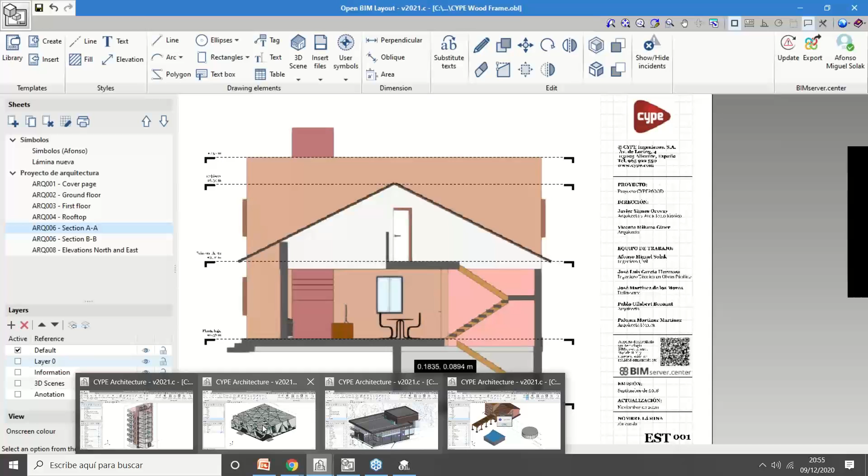So for example, when we send the architectural model from CYPE Architecture, then we send the CYPECAD model with the structural model, then the CYPE plumbing model, the CYPELEC model, all the models through the platform, we can synchronize these IFCs with Open BIM Model Checker and run a clash detection analysis. Okay, so we can create some combinations of files.

For example, let's verify if the structural model collides with the plumbing facilities model. We can create this combination of different IFCs, run this analysis and identify the issues that we can have in our project. Okay, so Open BIM Model Checker is the name of this software. There are some parts of the software that are free and some modules that are paid. So you can download the application directly from here and use the trial version to try.

Thank you. That was really helpful. One more question. Does the program apply different codes? Yes, actually it depends on the discipline. So we have different codes for structural calculation or, for example, thermal analysis. Actually, there is a page here on CYPE's site. Let's see, CYPE codes. There it is. So here we can see a list of the codes that are implemented in the CYPE tools.

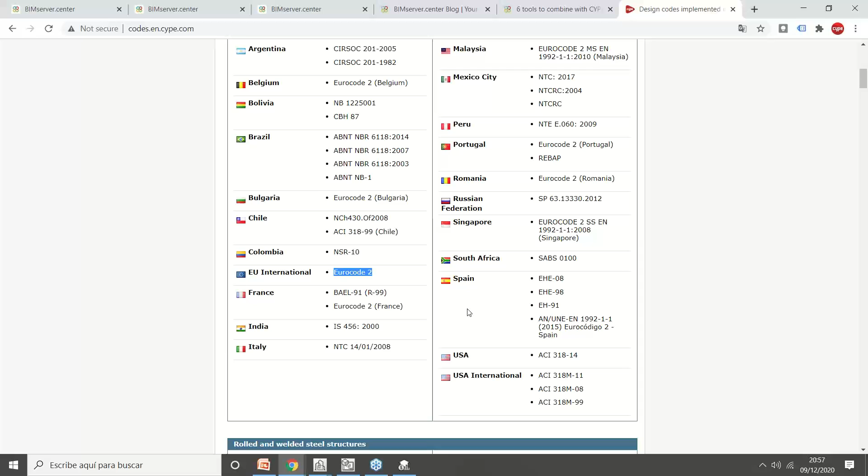So we have them for different countries. For example, just for concrete structures, we have these codes that were implemented. For the USA, we have these codes here. We also have the Eurocodes here. Okay. Then, for example, for steel structures, we have these codes here. The Eurocode we have here. The USA codes we have here. Then for cold-formed steel structures, different codes.

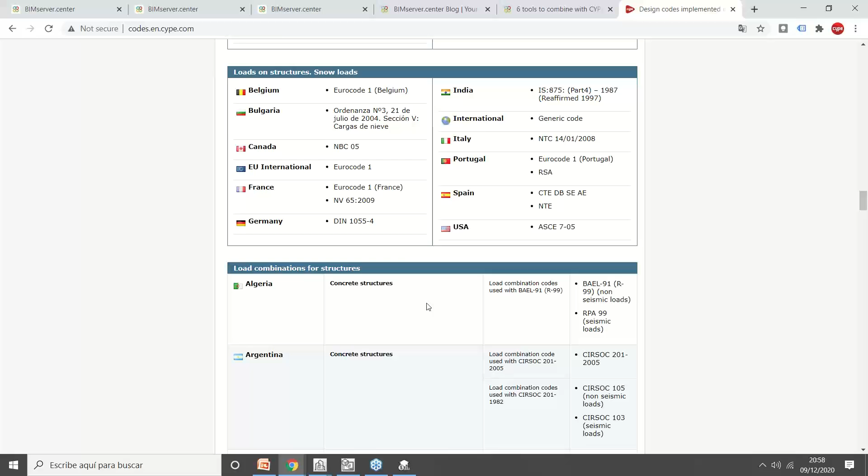So here we have all the codes that are implemented in the different applications that we have, not just on the platform, but also in traditional tools that have been available since CYPE started these activities 36 years ago.